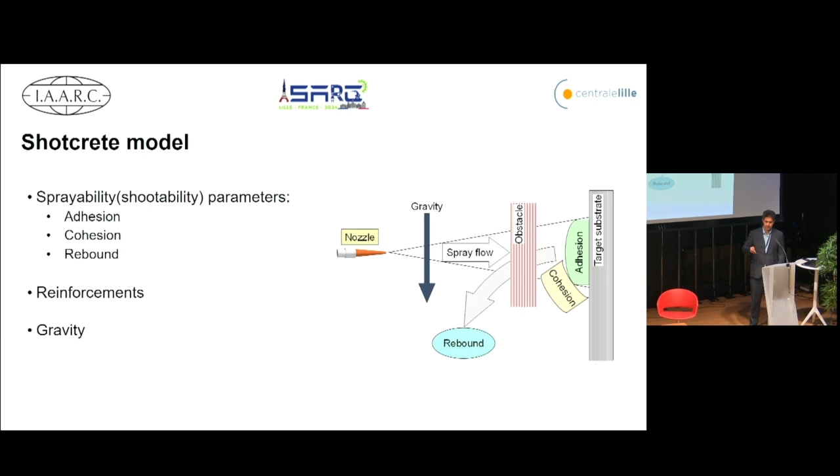In our methodology, we first hypothesized that shotcrete constituents are actually particles. And then we select this swarm of particles and initialize them at the tip of the nozzle with a randomized direction and velocity bounded by this spray cone. And this spread parameter is actually tunable in our simulation, if needed.

One difference of our approach to previous research is that as soon as the particle is emitted, it's affected by gravity, and at each time step, a velocity in the z direction or in downwards direction is added to the particle. So instead of hitting that xyz coordinate, it would hit xyz prime. Then there's this lifespan of every particle. If it adheres to a surface, it becomes deactivated, or if it goes down below the zero level, it would also get deactivated.

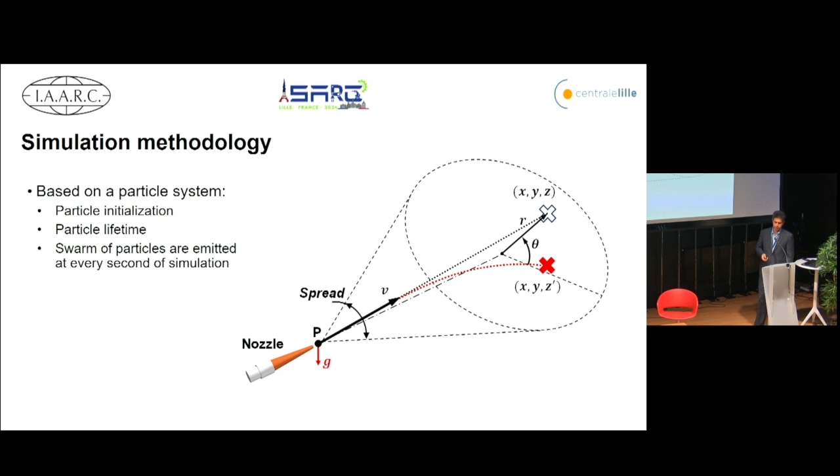We assume that at small time steps, particles travel on lines. Therefore, finding the collision problem is conveniently reduced to finding collision between a line segment and, for example, a plane that represents a wall, or other simple geometries such as cylinders. Therefore, we know the position at the moment and the next position. If there is a collision, we could calculate the point of contact. And at the point of contact, the particle is assigned a random variable, which we call chance.

Also, consulting what is known in the literature as Melbye curves, who did some experimental work on what parameters are affecting the rebound phenomenon, we can conclude if the particle rebounds or sticks to the wall. If it rebounds, then a new velocity is assigned to it, which is the reflection with respect to the normal at that point, and also the coefficient of restitution. But if it sticks to the wall, then it becomes deactivated, and the height field and the visualization are updated.

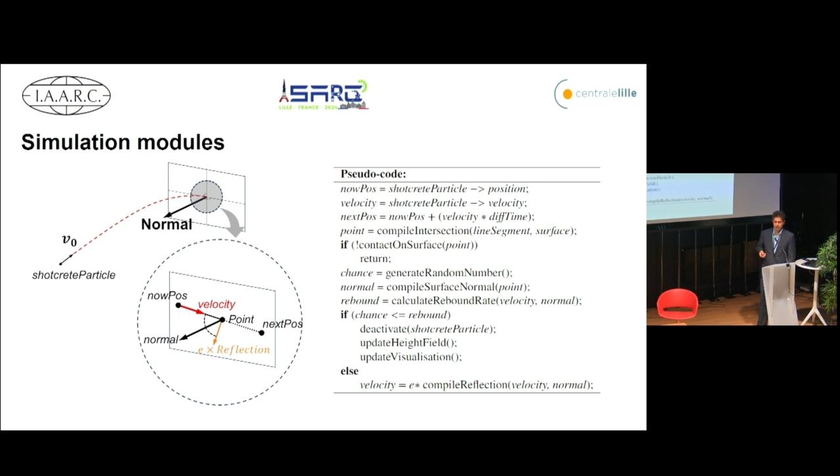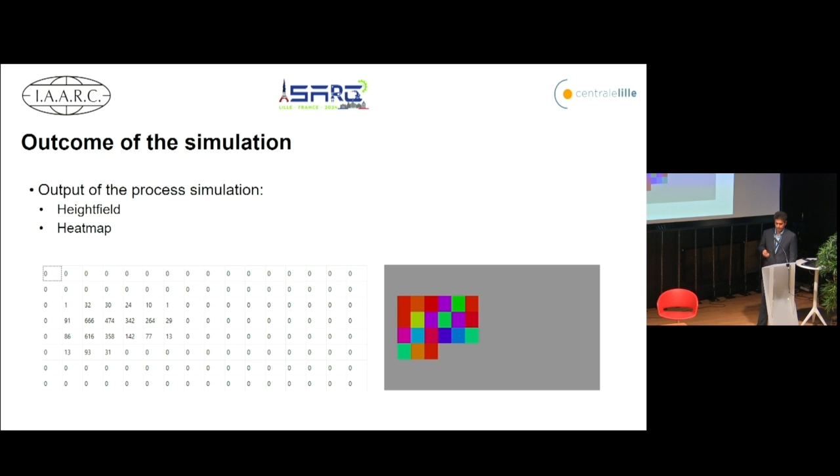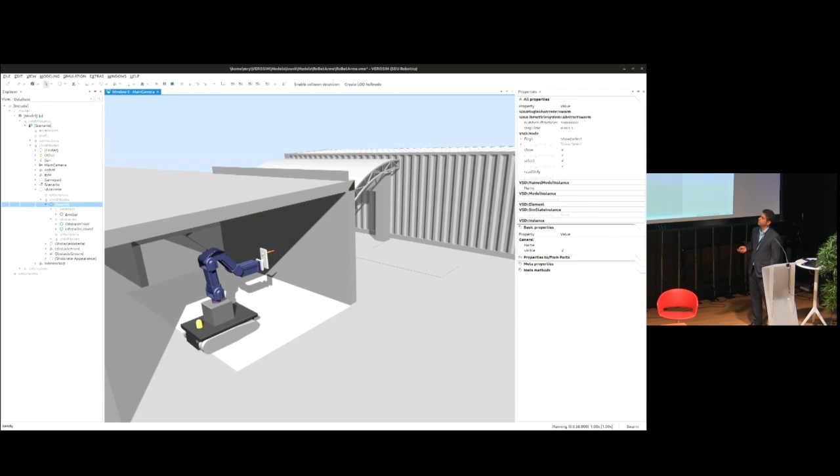Now we can see an animation of what we have at the moment. Here we have the construction site and then the robot, which is a conceptual robot with different modes of motion, that goes into the scene. And here we can put different planes on which we can capture the accumulation of concrete, and also on the ground to capture the rebound.

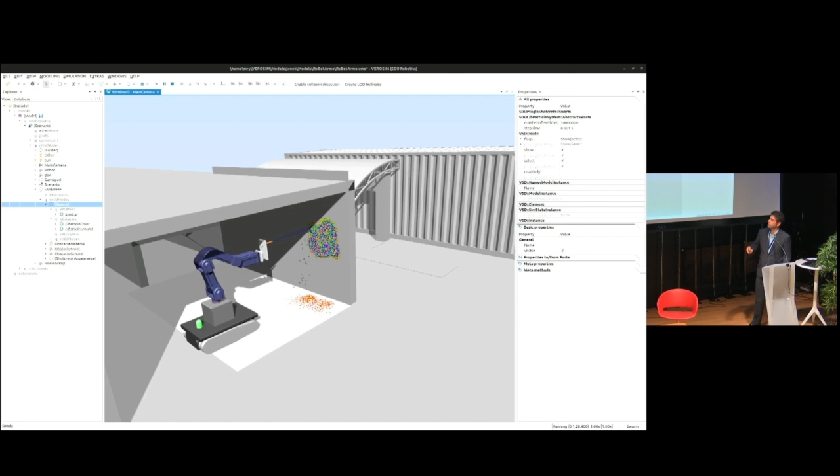And if the simulations are accurate enough, even the robot knows where the rebound would land, and it can avoid the rebound to protect itself, or to protect the mobile platform, which becomes really slippery if it goes into the concrete. And here we can see that with 10 million particles and 100,000 being emitted every second, we have almost real-time performance.

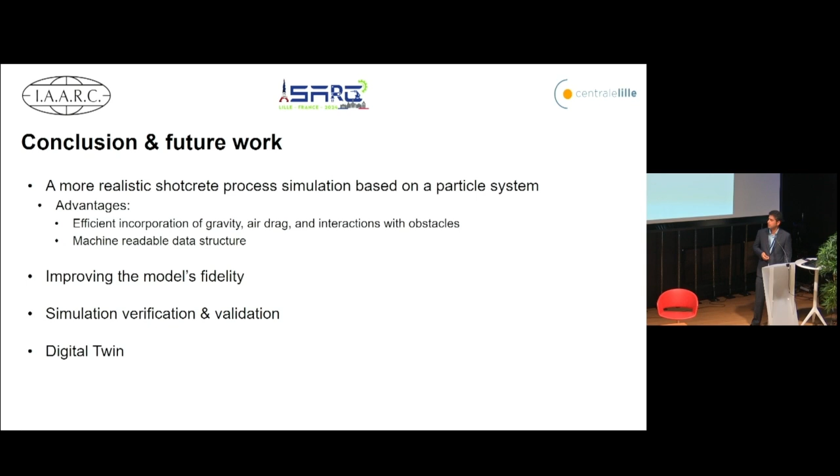We presented a new realistic shotcrete process simulation, which is based on a particle system. There are certain advantages over the previous work. It can more efficiently incorporate gravity and other dynamic forces such as air drag. And it can simulate interaction with obstacles. The output is machine readable. And also, for next steps, we are trying to improve the model's fidelity and do verification and validation, and ultimately design a digital twin.